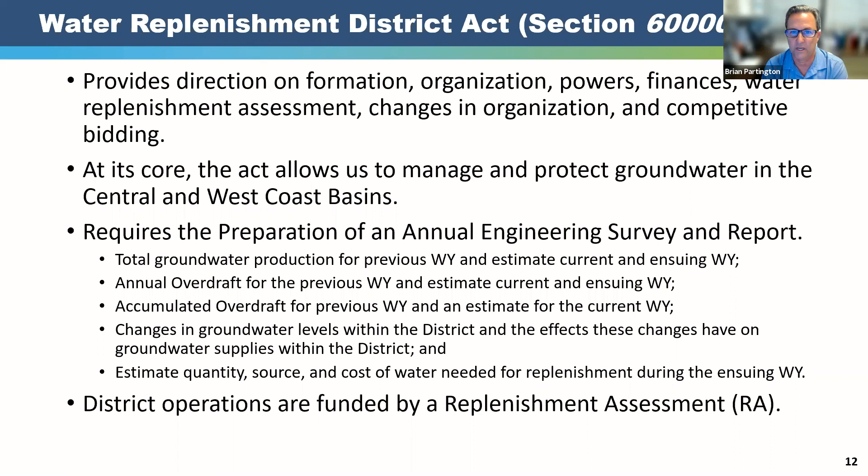Really what that looks at is a 3-year period. It looks at documenting the previous water year conditions, then makes an estimate for the current water year, and then we make projections for the ensuing water year. We look at things like total groundwater production, we calculate annual overdrafts, and we watch our accumulated overdraft over time. We really look at changes in groundwater levels within the district and how that affects the groundwater supplies. At the end of all that analysis, we estimate the quantity, the source, and the cost of this water that's needed for the replenishment for the ensuing year. Our district funds are basically raised through a replenishment assessment, which I'll have a slide on later.

These are 4 strategic goals that help guide us in our operations. The first one is to expand replenishment, which mainly means securing replenishment sources like recycled water, and utilizing available storage space so we can fill up the basin and use it for later years. We also want to expand extraction, so we want to maximize pumping in the basin, and we look and help our pumpers find new extraction sites within the basins.

And then we may take on remediation projects - I'll talk a little later about one of the regional brackish water projects we have planned for the West Basin to bring more water to the area. We also like to do things in an innovative way, increasing our efficiency. Those are all really good things to have. And then we also want to promote organizational excellence - we want to be the best at what we do.

This is just a quick slide on our 5-year strategic plan and how these various planning efforts and programs align with our strategic goals. At the top, there are a couple of mega planning projects we're working through right now to really make our basin locally sustainable. A couple of those projects: the regional brackish groundwater project we're talking about, and also in LA on the northern portion of the Los Angeles forebay, we're working with the Los Angeles Department of Water and Power on a joint master planning effort to really maximize the extraction and injection of water in that area.

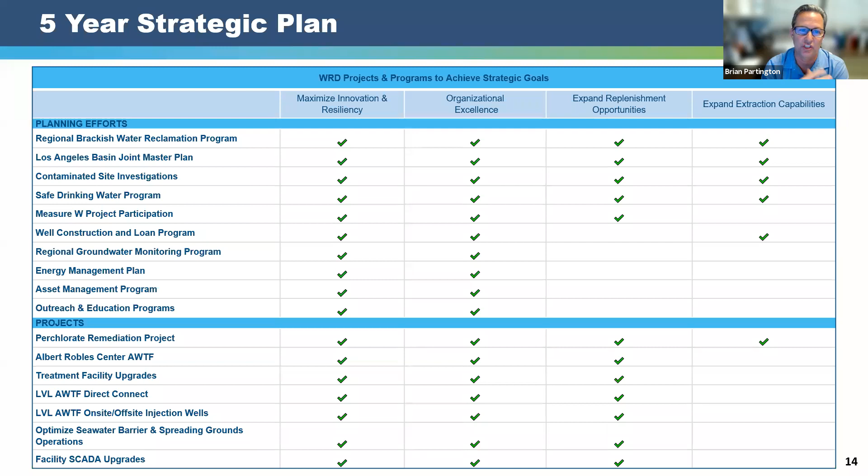There are a couple of different ways that we manage the basin. First and foremost, we replenish the basin's groundwater. Then we also conduct basin monitoring of over 350 deep nested groundwater monitoring wells that we've installed in collaboration with the USGS. These screens are greater than 1,000 feet, and some of our deepest wells are down to 2,900 feet, so a fairly deep alluvial basin. We've also implemented dozens of groundwater cleanup projects to help our pumpers address not only naturally occurring constituents like iron and manganese, but also man-made constituents like volatile organic compounds such as PCE and TCE.

And then lastly, we have a very robust groundwater basin model that was developed by the USGS. This really helps us with managing the groundwater basins and going through and evaluating various different scenarios for the future.

As I mentioned before, we use a lot of water in the basin, and the figure on the right shows the distribution of both inactive and active water supply wells in both basins. If you go to the lower left, that totals things up. In total, we currently have 423 active water supply wells, and last year those wells produced about 201,000 acre feet. That's a little below the total adjudicated right for both basins, which is just north of 281,000 acre feet.

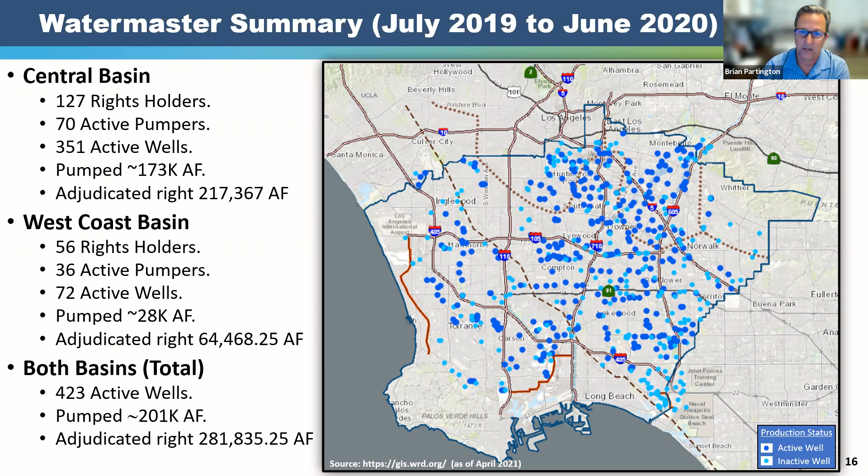In order to offset the pumping in the basin, we need to replenish it, and we do that in two main areas: the spreading grounds and the injection barriers. This is a generalized cross-section through the basin. The aquifers are shown in blue, and groundwater generally flows from the right-hand side to the left-hand side of the figure, from the forebays out to the ocean. The spreading grounds are located on the right-hand side within the Montebello forebay, because the sediments in that portion of the basin are predominantly coarse-grained, allowing surface water to easily percolate down into the subsurface, thereby replenishing the central basin.

The injection barriers are located on the left-hand side of the figure, along the coast for a reason. They want to prevent seawater intrusion, but they also serve an important part of our replenishment supply because they provide water to both the west coast and the southern portion of the central basin.

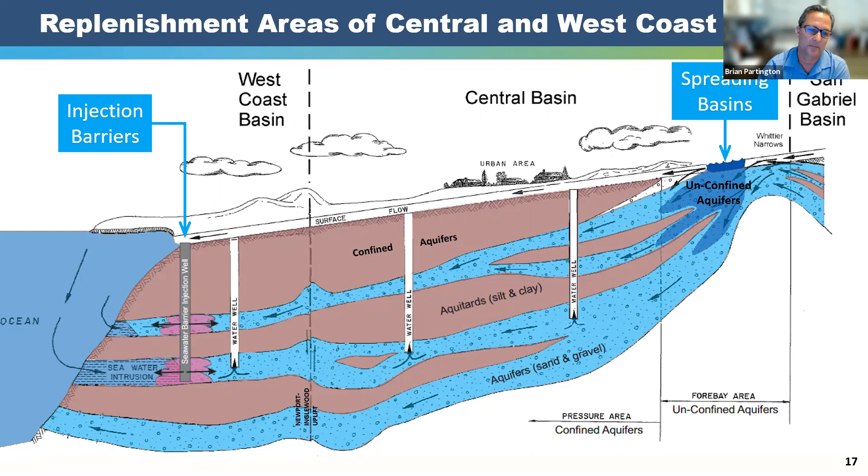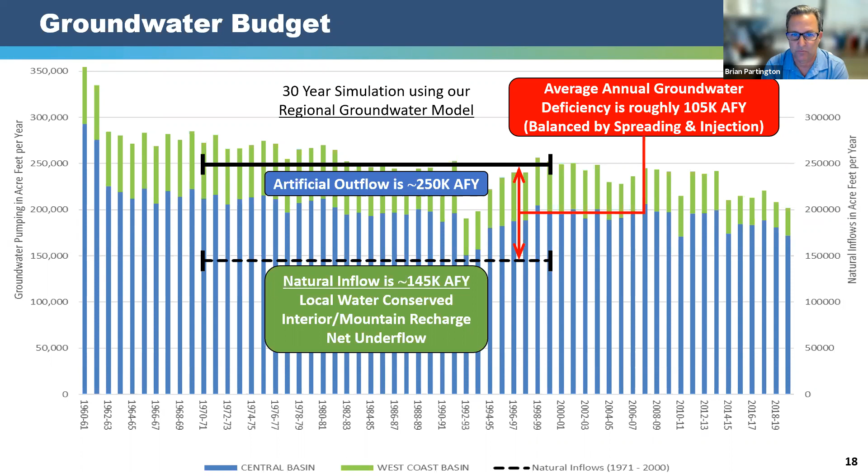We use the results of our groundwater model to help us manage the groundwater basins. We look at a 30-year modeling period, from 1971 to 2000, shown on those two black lines. The groundwater budget looks at the inflows and outflows so we can calculate the average annual groundwater deficiency. The artificial outflows, mainly pumping, are about 250,000 acre feet per year, and the natural inflows—a combination of local water, interior/mountain recharge, and net underflow—are about 145,000 acre feet per year. If you take the difference between those two values, that's the amount of water we need to balance the basin, roughly about 105,000 acre feet per year.

Each year we calculate the annual overdraft, and that number is tracked as an accumulation based on our board of directors' adopted optimum and minimum quantities for the basin. On the figure above, you can see two horizontal lines. The upper one is the optimum quantity, at 612,000 acre feet, and the minimum quantity, the lower line, is 900,000 acre feet.

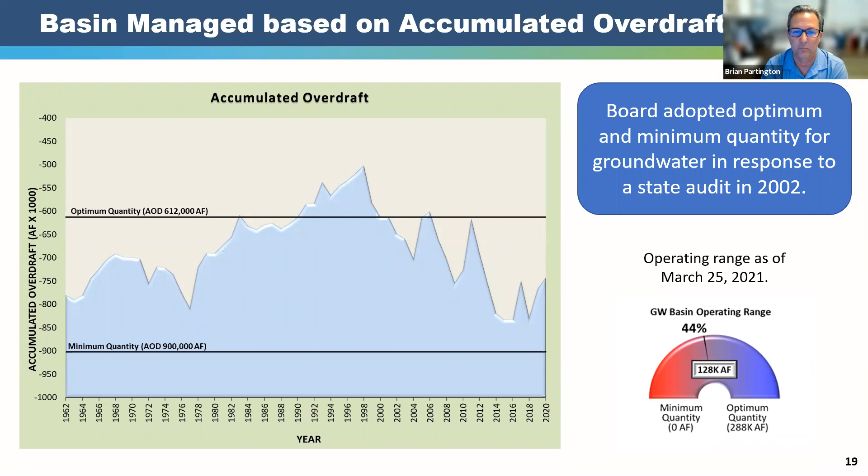It really is just a balancing act that's ever changing, but we always strive to maintain the optimum quantity, so that we can prepare for this never-ending cycle of droughts that we experience here in the southwestern US. As you can see from the chart, the past couple decades haven't been very pretty, considering the persistent drought conditions, which may have started around the early 2000s. Overall, we're shooting to get back up to the optimum quantity so that when those dry years happen, we'll have plenty of water left in the tank.

The way we fund our operations is through a replenishment assessment, which helps us pay for the water WRD purchases, and also helps fund the projects and programs we have. If we take the total cost of service divided by the total groundwater pumped, that's the amount we end up charging our pumpers. We do it in a unique way where we reach out and seek guidance from our pumping community, through two different types of committees.

The first one being the Budget Advisory Committee, or the BAC, and then the Technical Advisory Committee, or the TAC. They provide guidance to our board of directors for them to make decisions on how to raise rates for the replenishment assessment or maintain a certain rate.

All pumpers, regardless of the basin, are charged the same rate. So it's one fee across the basin, and currently we're charging $382 per acre foot, and that's for the 2020/21 fiscal year.

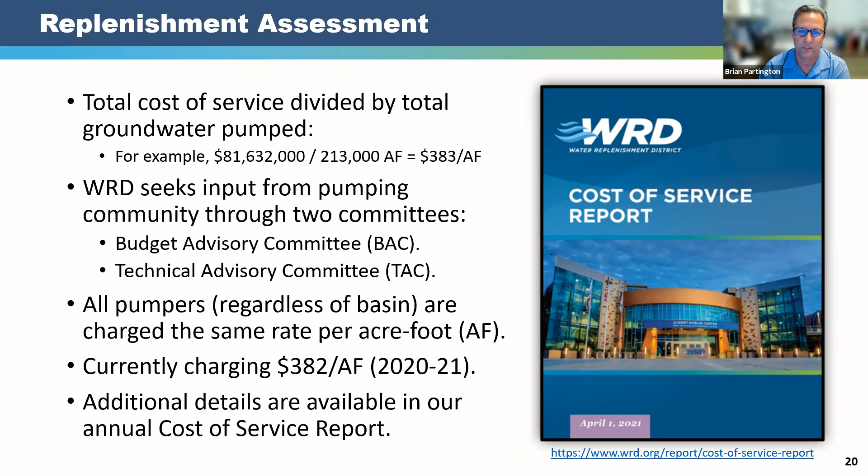If you needed any additional details, we prepare an annual report called our cost of service report. It has a lot of good historical information, and then it goes into the details of our projects and programs, with a lengthy financial analysis of how we come to our replenishment assessment. So next slide, I'm going to show a few slides focusing on the replenishment of groundwater, both the spreading grounds and the injection barriers.

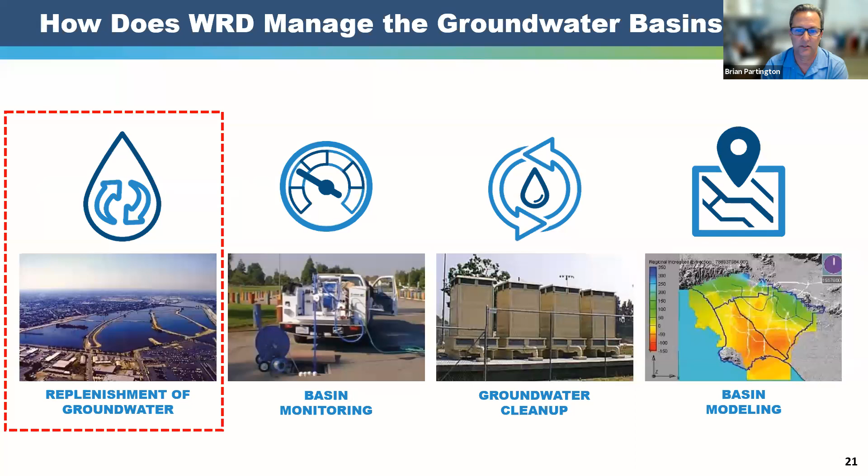On the right-hand side, you see this animation of the spreading grounds. You fill up the basins, and that water is allowed to percolate down into the basin, providing replenishment for us to continue our pumping. We don't own these facilities; we just purchase the water, and those facilities are owned by the LA County Department of Public Works, who are responsible for operating them. So there's quite a bit of coordination between our agencies.

There are essentially two large spreading grounds, the Rio Hondo and the San Gabriel. There's also a portion of the unlined San Gabriel River where there are some rubber dams, allowing some additional spreading of water in that area. This is a significant amount of the replenishment that occurs in our basin.

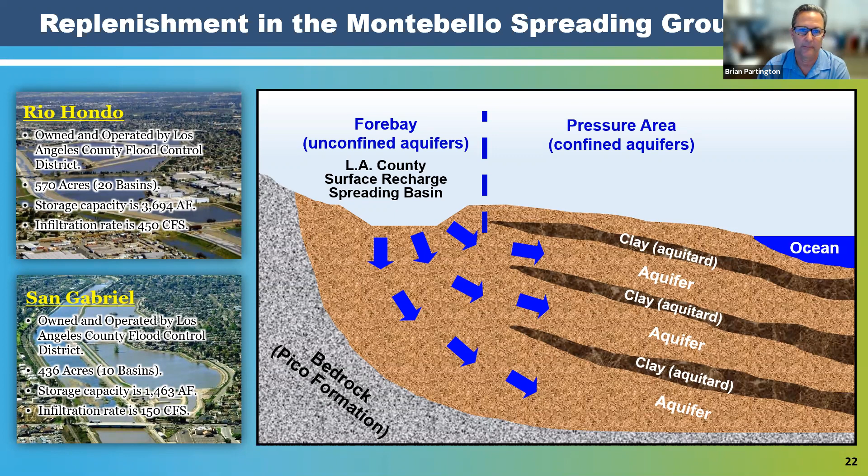This is really the key concept of one of our major programs that we recently wrapped up, the Water Independence Now program, finished with the completion of our advanced wastewater treatment facility. We really don't purchase imported water for spreading in the Montebello Forebay area anymore. Instead, we produce about 10,000 acre feet per year of advanced treated water from our Albert Robles Center in the city of Pico Rivera.

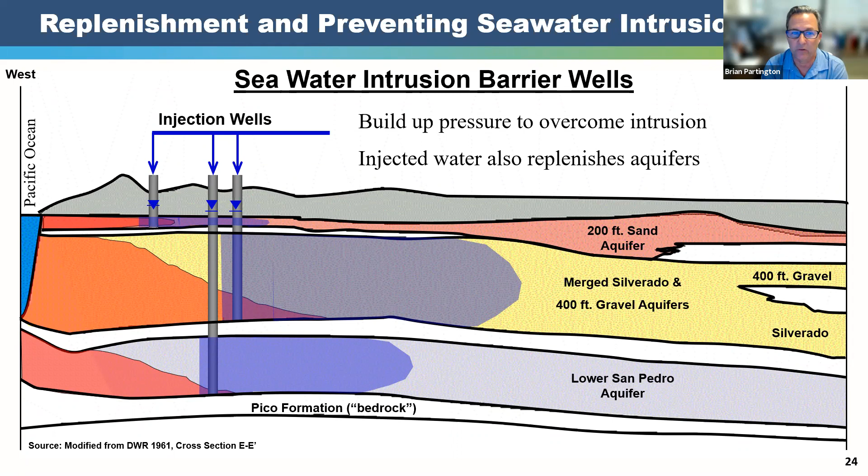Again, we don't own those facilities; LA County Department of Public Works owns and operates those. So again, there's quite a bit of coordination we need to have between our agencies.

However, all the barriers are now permitted to accept 100% recycled water, and so we have plans to increase the use of advanced treated water. One area we're looking at are injection wells, or inland injection wells, because we want to maximize the water we're generating at our advanced treated facilities.

In this case, the Leo J. Vander Lans facility supplies water to the Alamitos Gap area. So a lot of work that we're doing in this area.

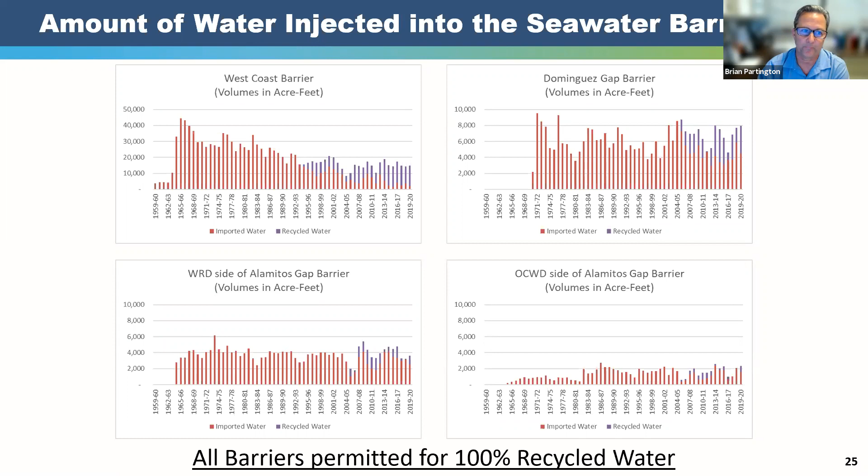As we mentioned in one of my earlier slides, as part of the engineering survey and report, we make an educated guess as to the planned water purchases for both barriers and the spreading grounds, based on historical trends as well as the groundwater modeling conducted by the USGS. A summary is provided on the right-hand side.

For example, the Montebello Forebay, we plan to purchase just over 61,000 acre-feet for that year, and for the seawater barriers, it's about 28,500, so in total about 90,000 acre-feet of planned water purchases to replenish the basins and overcome that annual overdraft.

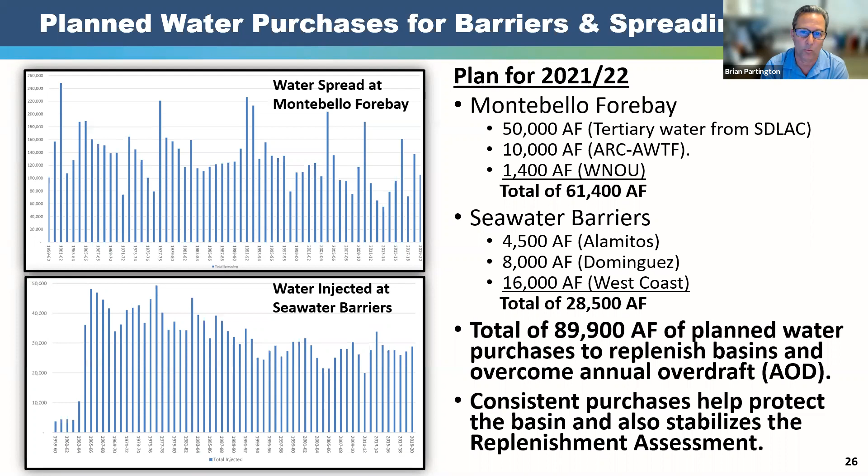Another key point is that these consistent purchases not only help protect the basin, but they also help stabilize the replenishment assessment. It really helps avoid spikes in buying a lot of water and then the RA going up.

With all these practices, groundwater basin management has really resulted in stable groundwater conditions for the past 50 years. This is a water level graph of four key wells in the basins. You can see prior to WRD's formation, the water levels had dropped to some pretty low levels. Then after we were formed and started replenishing the basin, those basins recovered and have stabilized over the past 50 years.

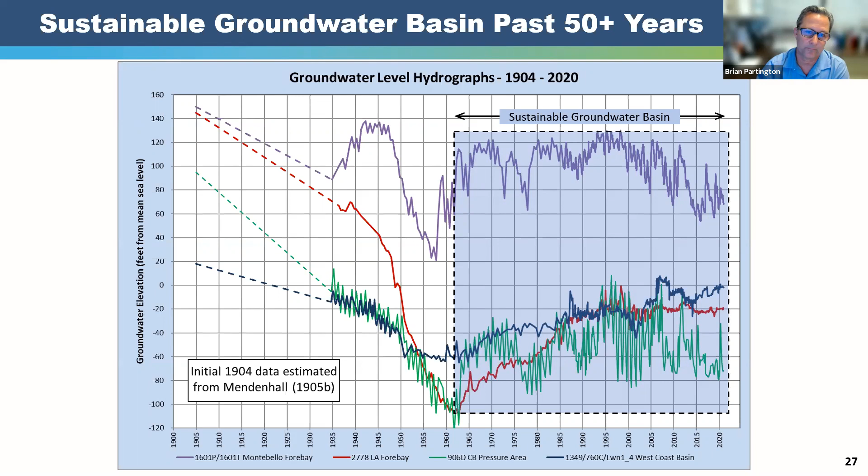I also include a couple of slides to talk very briefly about our plans for the future. Earlier I mentioned our desire to become independent of imported water, and we really accomplished that goal with the water we purchased for the spreading grounds. We finished the Albert Robles Center, and so now we're no longer purchasing imported water for the spreading grounds.

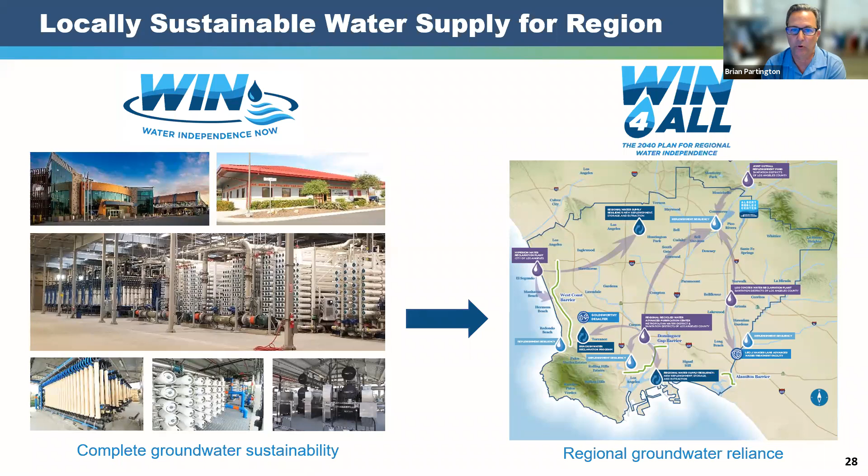We're now transitioning into what we call our WIN 4 ALL. So we have the Water Independence Now, or WIN, and now we're expanding that program to the entire basin.

So really what we're doing is trying to aim to use more local water. We want to increase our recycled water use, and then the big part of the puzzle is being able to fully utilize that available groundwater storage space that's now available since the recently amended judgments. All of this would equal a locally sustainable water supply for our entire region.

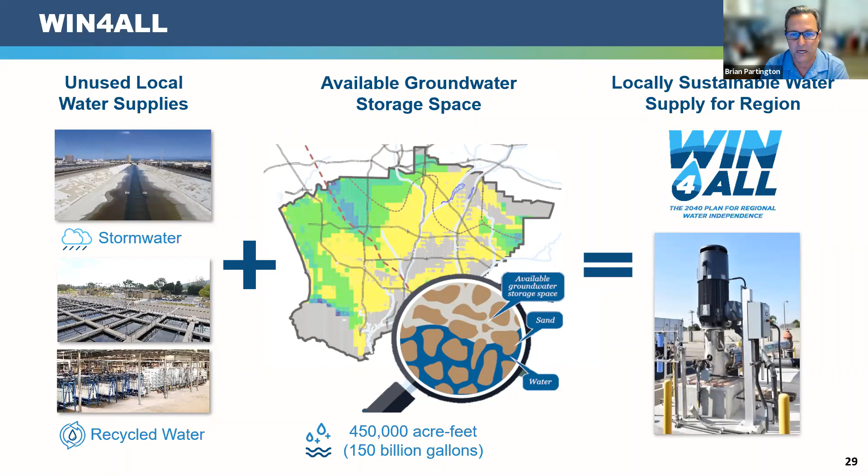We're also looking at some fairly large planning efforts. For example, the large saline plume located in the West Coast Basin will be part of our regional brackish water project. But overall, the plans include increased pumping. We want to get up to that adjudicated amount of 281,000 acre-feet, and then more recharge in the basin, putting more water into the barrier, more into the spreading grounds, and also installing inland injection wells.

So for hydrogeologists and lots of engineers out there that want to work in the LA Basin, the future looks bright, but we really couldn't do it without the regional partners that we have, including MWD, LA County Sanitation District, LADWP, LA SAN, and of course our entire pumping community.

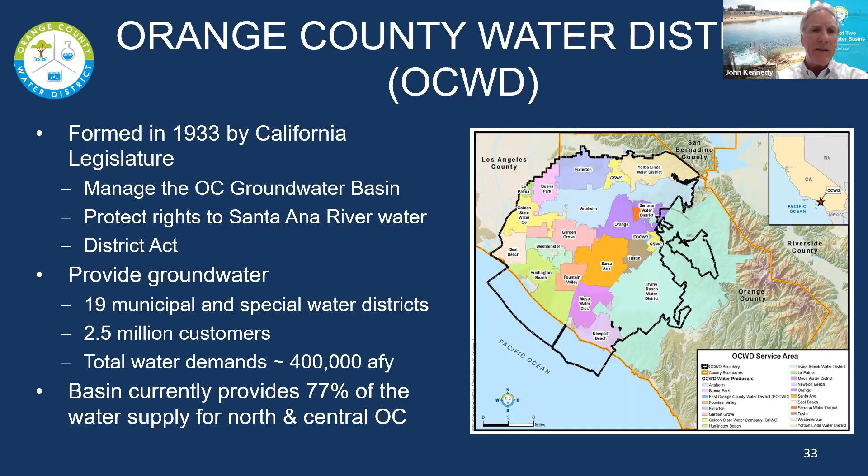One more quick thing to mention: we share a boundary with the Water Replenishment District, and our groundwater basins are connected—it's really just a political boundary that separates us. Our staff and Brian's staff tried to estimate how water flows back and forth between our two basins. We each have a model, but our two models were measuring different amounts of water going back and forth. So we've hired a consultant to figure out exactly how much water flows between our basins, so we know that and can maybe take some actions in the future.

We also have, primarily along our coast, amber colored groundwater in portions of our basin. The water is very good and clean, but it has this amber tint—you pump it out and it looks like iced tea, which isn't something you can sell to customers. So some of the retailers have projects to remove that colored water before they serve it.

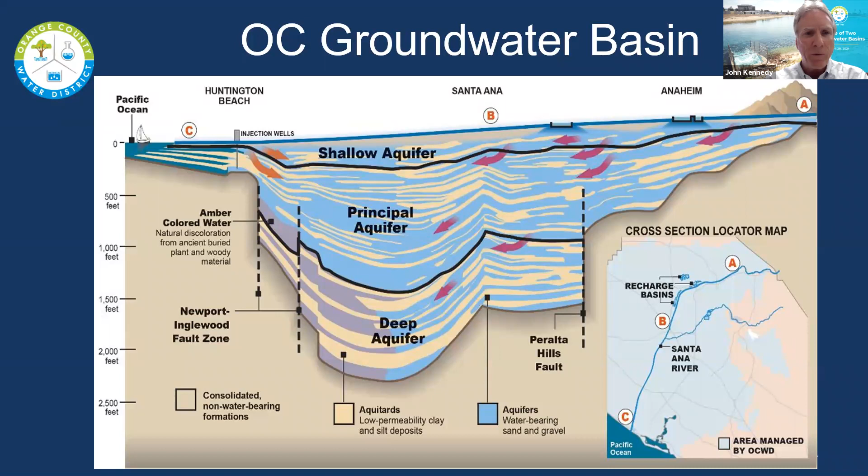I mentioned earlier how when we were formed, it was because of the farmers in Orange County suing the upper watershed people. We actually had lawsuits in the watershed up to 1969. But in 69, we finally made peace with the upper watershed. We have what's called the Santa Ana River Judgment. In that judgment, we divided up the river and guaranteed that everybody would get a little bit of the river. So we meet with these agencies all the time to keep peace in the watershed, to coordinate with them, to avoid suing them.

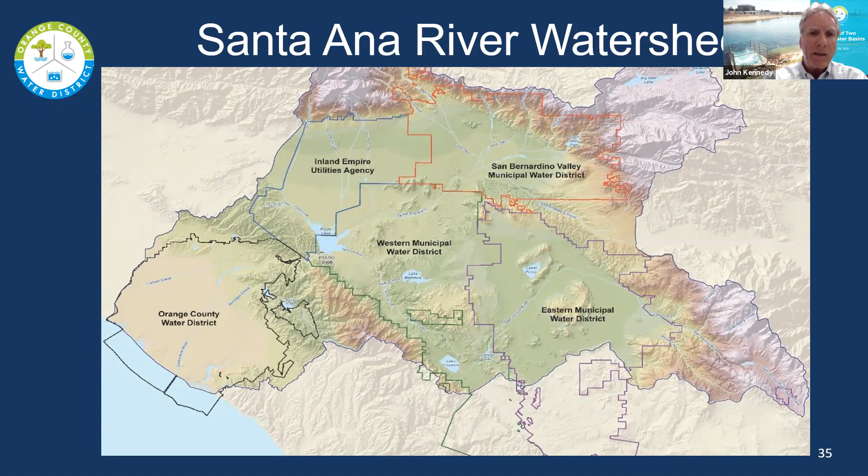We also have a district act passed by the Sacramento legislature that gives us our powers and tells us exactly what we can do. Basically, it says we will manage the groundwater basin. We can replenish the groundwater basin. We have a lot of different sources of water to replenish it. We protect the quality of the groundwater supplies. We also have to prevent seawater intrusion in our groundwater basin. We establish rates for people who want to pump water out of the basin. And we also have to prepare an annual report on the condition of the groundwater basin. We actually have to prove that there's either an annual overdraft or an accumulated overdraft of the basin before we can charge people for water, before we can set a replenishment assessment.

Then I also wanted to mention what's interesting - there's a couple powers we do not have. We cannot restrict groundwater production. We cannot tell people you can only pump this amount of water. Now, we do set the rates people pay for groundwater production, so we can indirectly control how much pumping there is in a basin by our rate structure, and I'll explain that later. Also, we can't prevent people from constructing new wells.

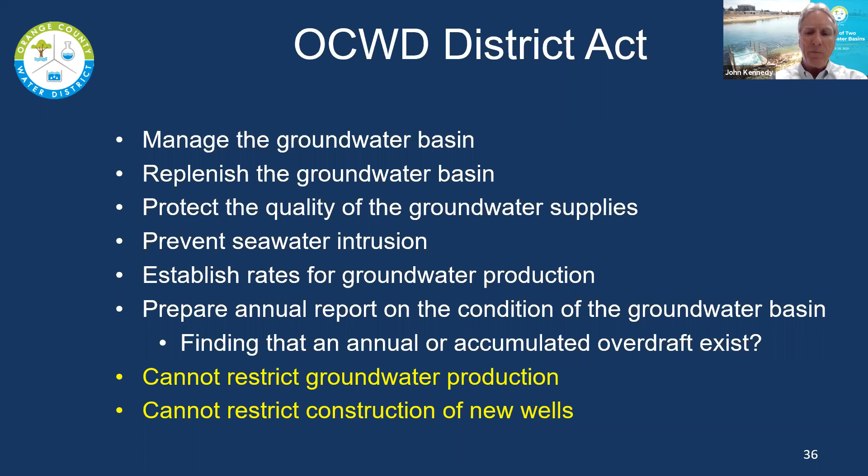Anybody in our service area can construct a well anywhere. A city can construct a well in another city. A homeowner, if you're mad at your local water department, can say, I'm going to get off the water department's water and build my own well in my own backyard. You can do that - you're going to need a few million dollars to do it. And somebody could decide they want to build a well close to the coastline, and we could tell them that's a bad idea, but people can do that. So we do have limited powers here at the Water District.

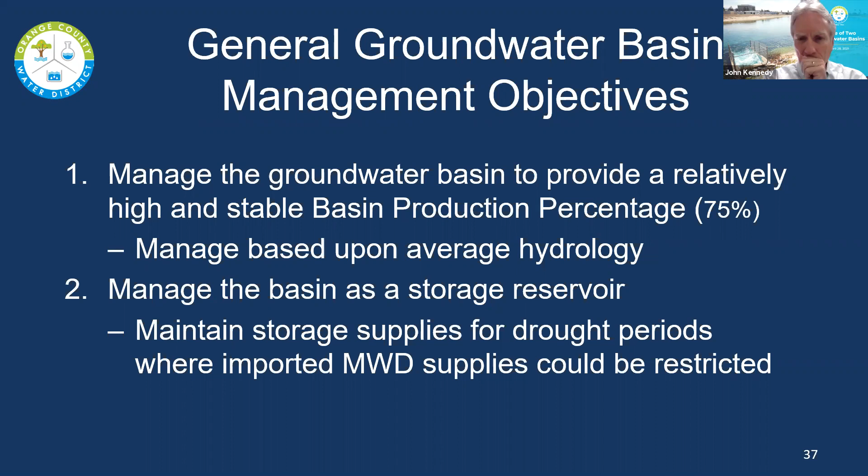I want to mention we work to conjunctively operate the groundwater basin with the Metropolitan Water District imported water system. So you can think of it, we have two different major sources of water: the groundwater basin and the imported water system.

So we have a pretty reliable water supply. During a drought period, we might overdraft the groundwater basin, but then we work to refill it during times of excess imported water. We're always working closely with Metropolitan Water District and the Municipal Water District of Orange County to follow their supply outlook, whether they have extra water or water is getting tight for them.

When excess imported water is available, we'll try to buy it to get it into our basin. We also have a contract where we store water for the Metropolitan Water District in our groundwater basin. We have another contract where if Metropolitan has a lot of extra water but we're not necessarily wanting to buy any that year,

they can give us that water and we can pay for it later. That's called a cyclic storage agreement.

We also maintain a commercial paper program to provide quick access to funding to purchase large blocks of imported water when they are available. This water is expensive, and you need to have money available to buy it in large quantities when you want to.

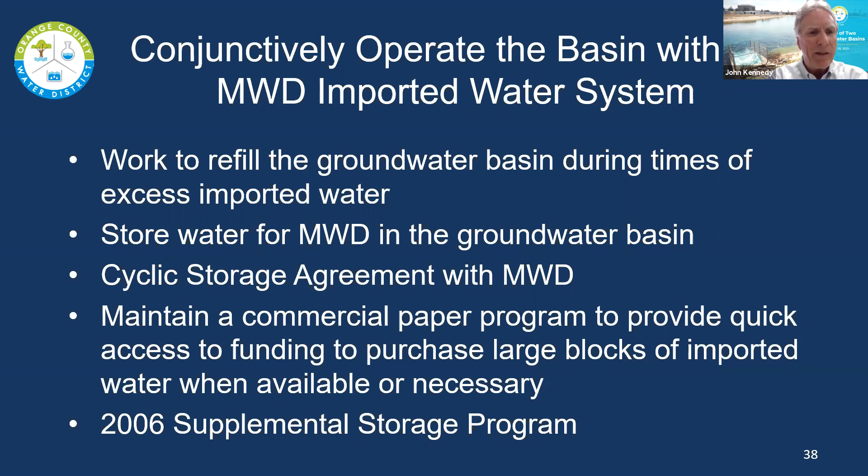In the commercial paper program, it's like a credit card for us, where we can make large purchases. We also had a supplemental storage program with the Metropolitan Water District back in 2006. That winter was a very wet year, and Metropolitan had a lot of excess water, and we took some of it that year. That was a short-term program.

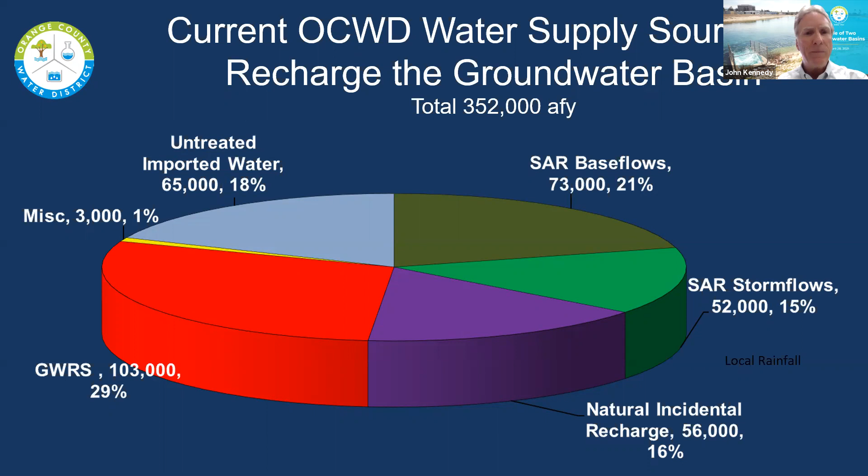And I literally would be getting complaints from the public works directors in Huntington Beach and Fountain Valley that water was seeping up into roads from the groundwater basin. We would have artesian conditions in Huntington Beach and parts of Fountain Valley. So we never want the groundwater basin to be completely full. We always want it to be a little bit empty, and you want to have empty space, because if you get a couple of wet winters, you have to have room to put that water that you capture.

But if you overdraft a basin too much, you'll get seawater intrusion in areas that are unprotected. You can also have the possibility of land subsidence if you overdraft a basin too much and don't refill it quicker. You can also have wells that are not deep enough to handle lower water levels. So in general, we try to keep the floor of the groundwater basin at minus 500,000 acre feet and don't overdraft it below that.

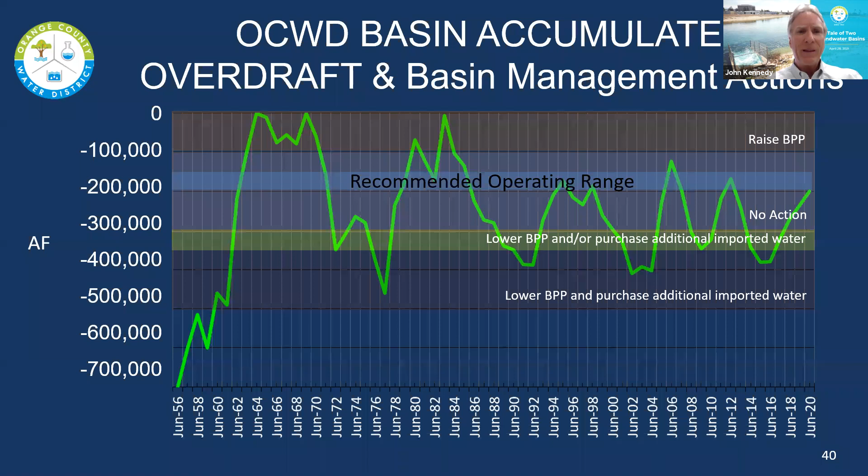We set the rates for groundwater pumping. We cannot tell people they can't pump, but by setting the rates, that's how we control production. We have a replenishment assessment, just like WRD does, plus an additional replenishment assessment, a basin production percentage, a basin equity assessment, a production limitation, and a production requirement.

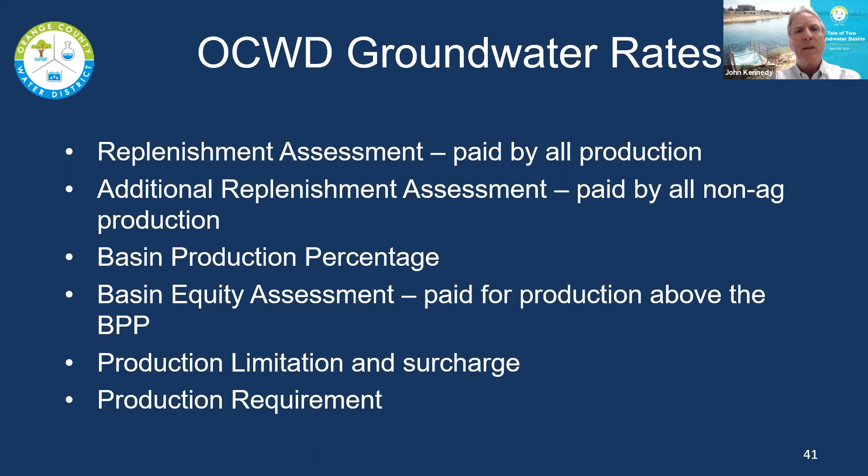Right now, anybody who pumps any groundwater out of our basin pays the replenishment assessment, the RA, which is $243.50.

The additional RA is paid by non-ag production, so the farming community doesn't pay it, but everyone else does. The additional RA is also $243.50. So if you're a city, your total bill for buying groundwater is $487 an acre foot that you pay to us.

The basin production percentage, as I mentioned, we established it in April. The acronym is BPP, and we use it to control pumping out of the basin. We have a policy to keep it at least 75%, or even higher if we can develop programs and projects to do that. We work to avoid changing the BPP by more than 5%, and that's something we do for the producers. The formula is simply groundwater divided by groundwater plus supplemental water, and supplemental water is imported water.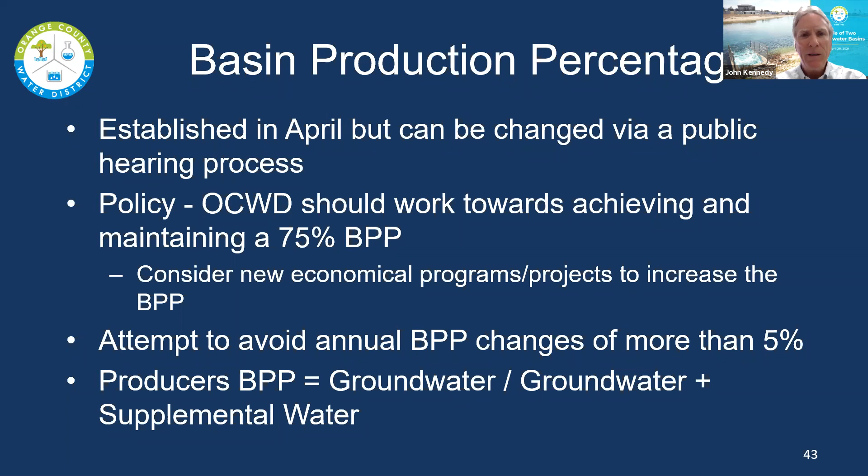This gives an example of how our rate structure works. It's a very unique rate structure, but this is for a typical water utility. Say this is a city with total water demands of 30,000 acre feet a year. The city pays the RA on any groundwater they pump, and if they go above the 77% production percentage, they pay the RA plus the BEA.

By setting the BEA, we're generally encouraging people to only pump up to the basin production percentage of 77%. The BEA is set at an amount such that if you go above the basin production percentage and buy additional groundwater, the cost is the same as buying imported water. So there's no financial advantage for anybody to pump above the BPP, and most producers limit their pumping to it.

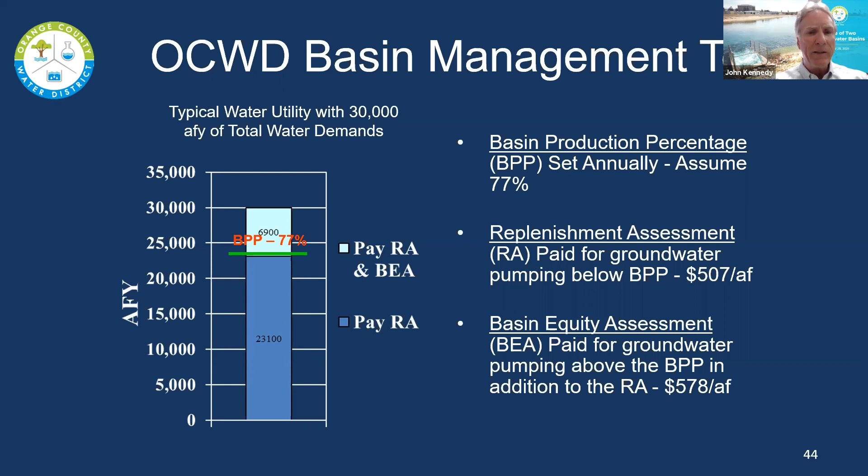How do we set the BPP? It's a kind of complicated formula that staff uses to establish a BPP to recommend to our board. We're basically taking all the water we expect to get into the groundwater basin using average hydrology — storm flows, natural incidental recharge, Santa Ana River base flows, the met water we buy. We subtract out any water if we want to refill the basin. We have the groundwater replenishment system making recycled water, and some other projects to pump above the BPP, but I won't get into that. We divide that by total water demands, and we also subtract out reclaimed water supplies since they're not in the BPP definition. We come up with a number, 77%, and recommend that to our board.

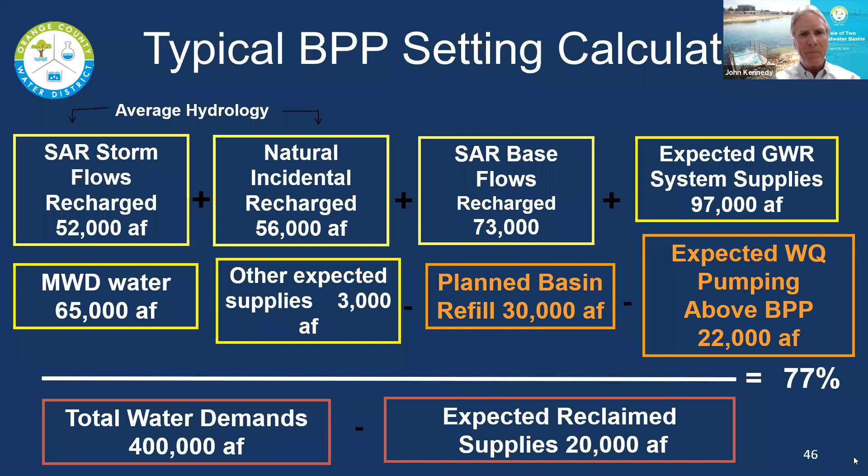Some important management policies here. Brian mentioned his groundwater basin has been adjudicated. We work very hard to avoid adjudicating our groundwater basin — doing so today would be extremely expensive and time consuming. An adjudication is where certain parties feel they're not getting enough water, that they're not being allowed to pump as much as they want, and those parties hire attorneys and go to court.

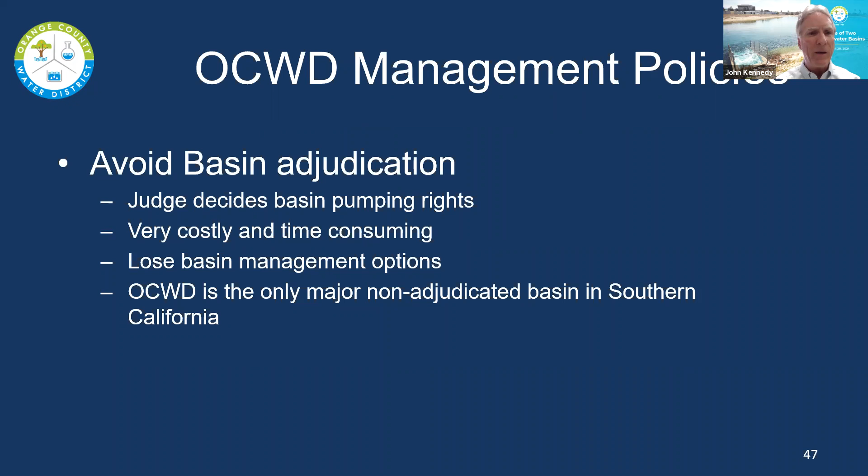And you get a judge to adjudicate how much water you're allowed to pump. But what happens is everybody who pumps water from the groundwater basin would have to hire an attorney. We have over 200 parties that pump groundwater from the basin, and they would all lawyer up and go to court. It would probably take a decade and tens of millions of dollars to adjudicate this groundwater basin. And once it's adjudicated, the judge is telling you basically how you have to operate. You don't have as much flexibility as we have now. We're a managed groundwater basin, so we have a lot of flexibility to change pumping, increase pumping, decrease pumping, and storing water. It would be a great loss for Orange County if our groundwater basin ever did become adjudicated, so we work to avoid that.

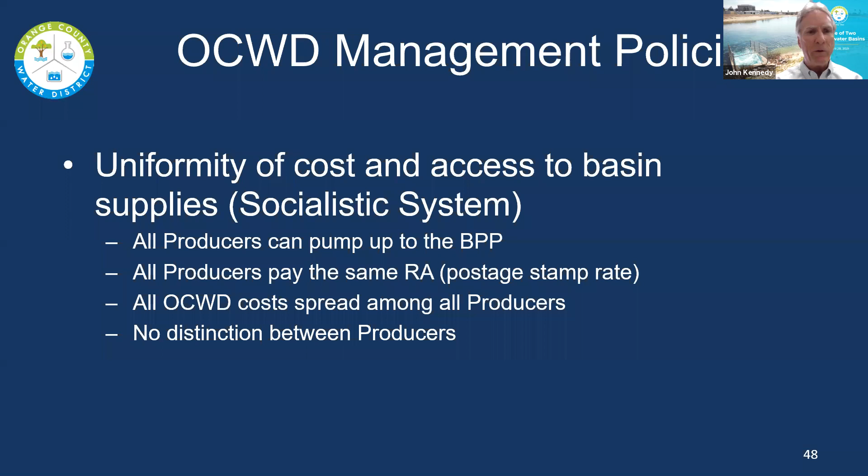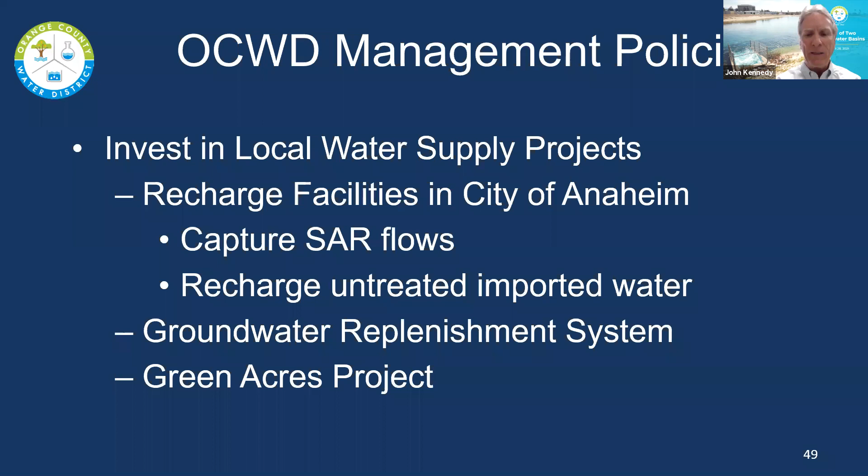Another policy we have is to invest in local water supply projects. We've developed a lot of recharge facilities in the city of Anaheim, which I'll show you. It allows us to capture a lot of water coming down the Santa Ana River. We developed the groundwater replenishment system, which allows us to recycle a lot of water, and we have a Green Acres project. The more local water supply projects we can build, the less imported water we need to bring into the area.

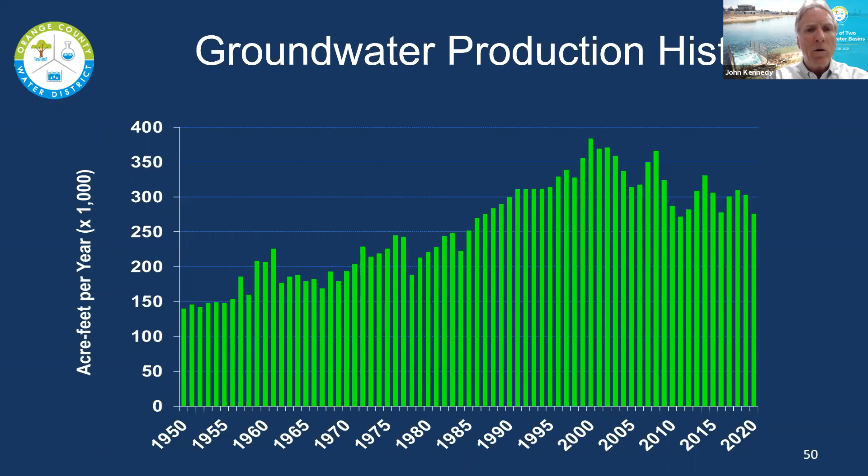This is a graphic we're very proud of, and it shows how we've been able to increase the sustainable yield of the groundwater basin over time. Back in the 1950s, typical pumping out of the basin was about 150,000 acre feet a year, and now it's typically above 300,000 acre feet a year. That's because of our programs and our projects. We've invested in the groundwater basin, and we have a lot more local sustainable water supply now for the area.

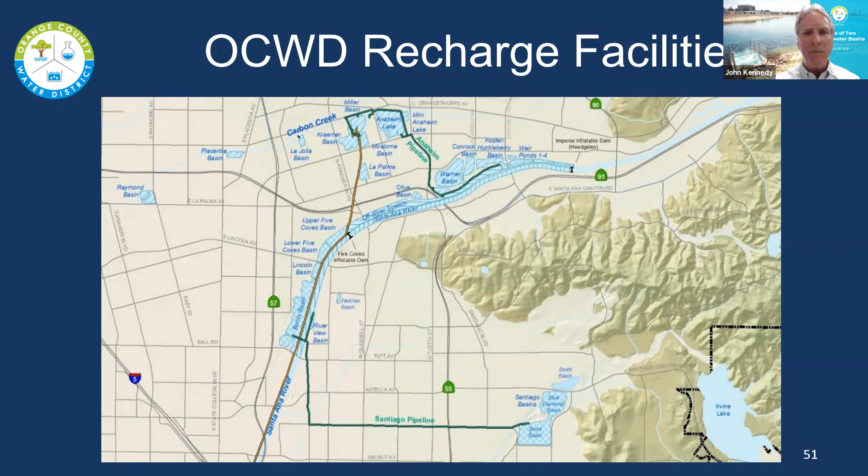I wanted to show our recharge facilities, primarily in the city of Anaheim. If you're driving along the 91 freeway near the 55, you see all those lakes to the north—those are recharge basins, where we're putting water in, and it slowly percolates down into the larger groundwater basin. We have over 1,000 acres of facilities up there, and it allows us to capture all the water coming down the Santa Ana River. We also buy imported water and put it in these basins, and we pump water from our groundwater replenishment system in Fountain Valley up to some of these recharge basins. It's a large facility, but it's a great benefit to the region.

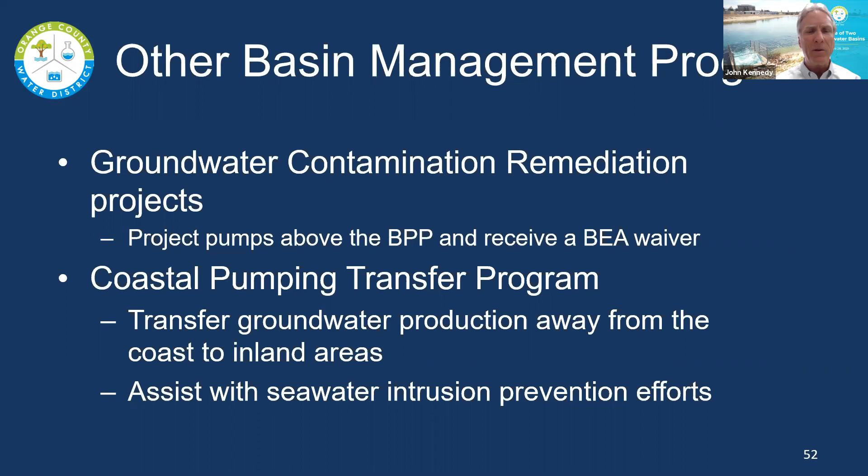I'm going to skip this slide since I'm over my time limit. That's the conclusion of the presentation, and I think Brian and I are available for any questions.